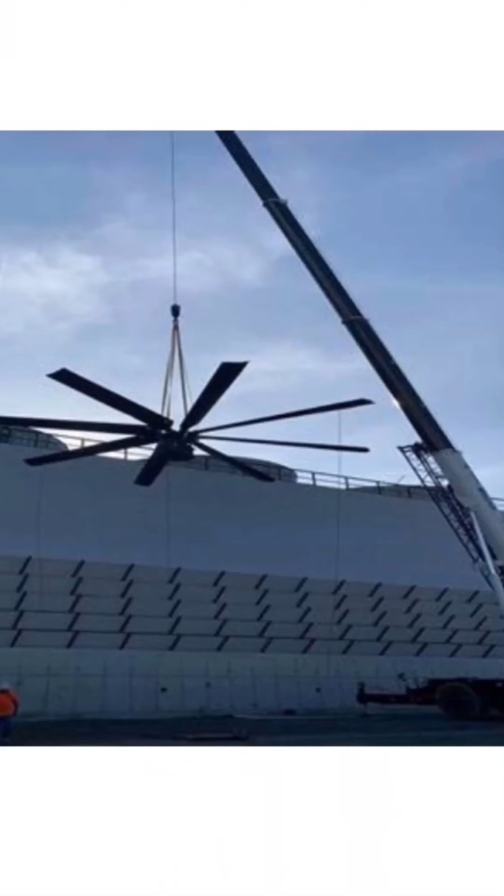The crane rigger has many responsibilities and plays an integral part in the safety of a job site where cranes are in operation. A crane rigger's responsibilities are to know how to fasten loads in order to meet company and federal rules, regulations, policies, and procedures. You must also know how to use appropriate cables, pulleys, winches, blocks and sheaves, wires, straps, and chains.

Crane riggers must also inspect equipment prior to use. They may need to oversee or direct crane operators. Crane riggers may need to complete paperwork at the end of a lift, documenting work completed and any problems encountered. They are also responsible for dismantling, cleaning, and storing equipment after use.

Education and experience are key to being a safe and efficient rigger. You'll need to complete training to learn how to work as a crane rigger. Cooling Towers LLC also requires our crane riggers to have specialized training and be familiar with the Occupational Safety and Health Administration, or OSHA, guidelines.

Skills inherent in rigging are knowing how to properly and safely use rigging equipment and how cranes operate. Riggers must have impeccable communication skills, be able to work well with others, and have strong mechanical aptitude. Having basic math skills and good judgment can help you succeed, as can knowing how to identify and solve problems.

This crane rigging training has been developed for those working around the rigging of loads for crane operation and covers the knowledge needed by a worker to safely and properly perform the many tasks required of a rigger. This training only covers the basics of rigging and does not certify you as a rigger.

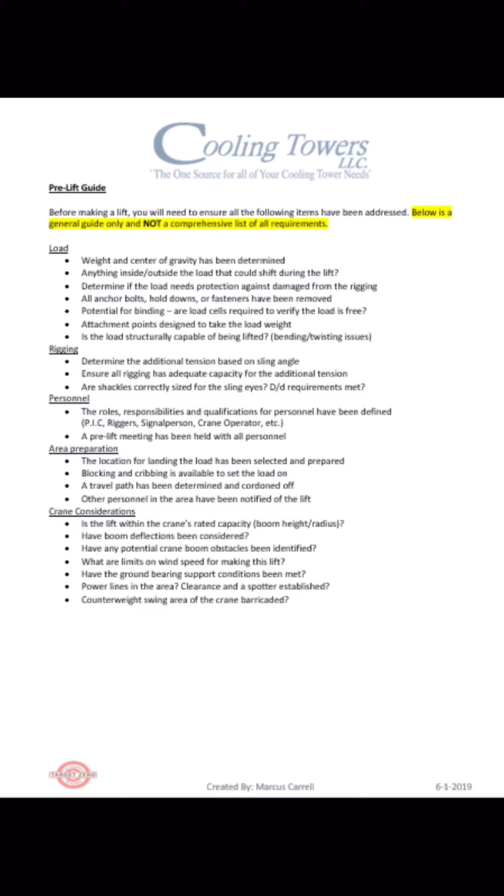Each day before being used, the slings, all fasteners and attachments shall be inspected for damage or defects by a competent person. Additionally, inspections shall be performed during sling use where service conditions warrant. Damaged or defective slings shall be immediately removed from service. Whenever any sling is used, the following practices shall be observed. Slings that are damaged or defective shall not be used.

Slings shall not be shortened by knots or bolts or other makeshift devices. Sling legs shall not be kinked. Slings shall not be loaded in excess of their rated capacity. Slings used in a basket hitch shall have the loads balanced to prevent slippage. Slings shall be securely attached to their loads. Slings shall be padded or protected from the sharp edges of their loads.

Suspended loads shall be kept clear of all obstacles. All employees shall be kept clear of loads about to be lifted and of suspended loads. Hands or fingers shall not be placed between the sling and its load while the sling is being tightened around the load. Shock loading is prohibited. A sling shall not be pulled from under a load when the load is resting on the sling.

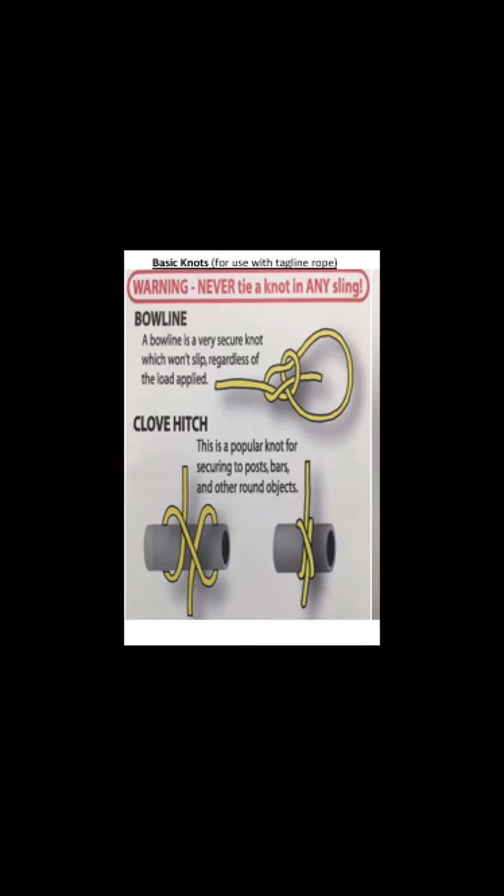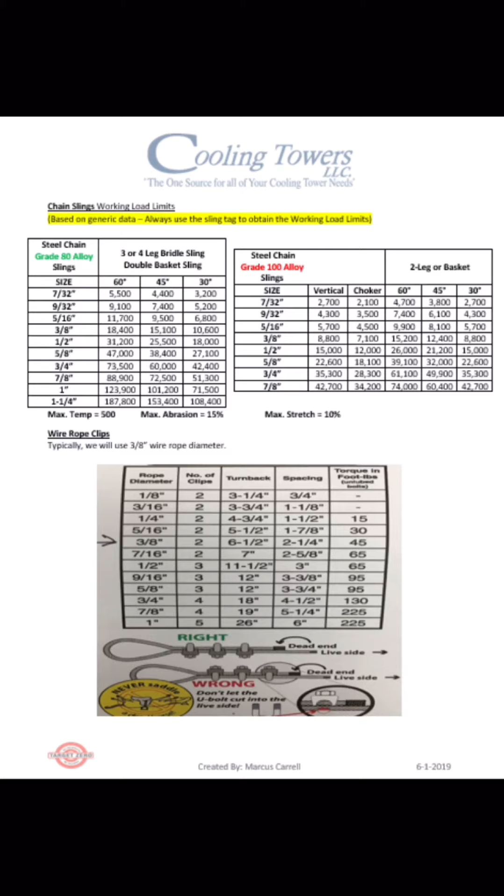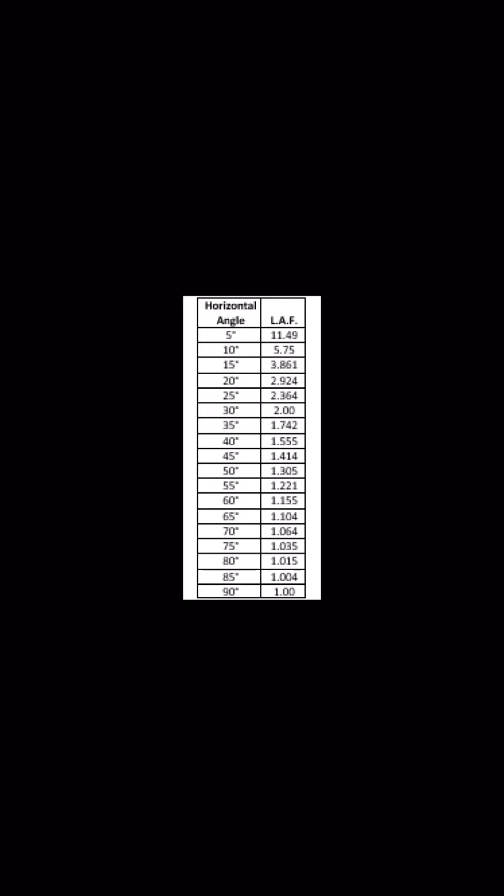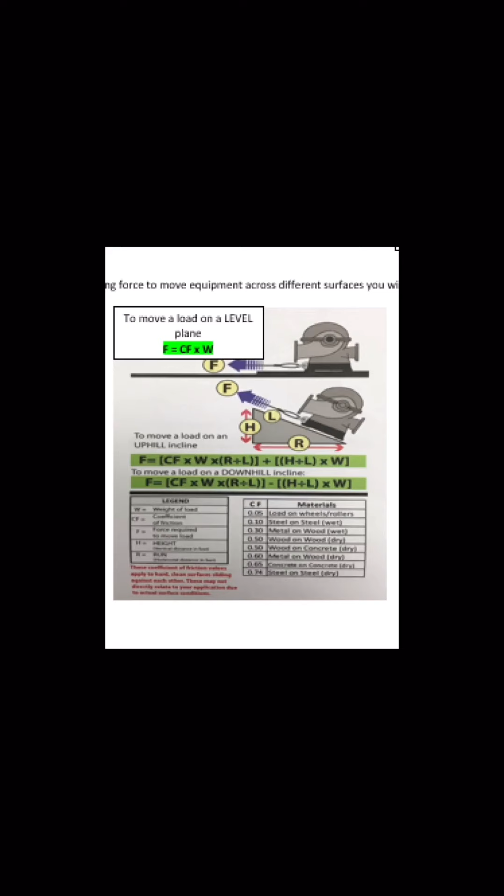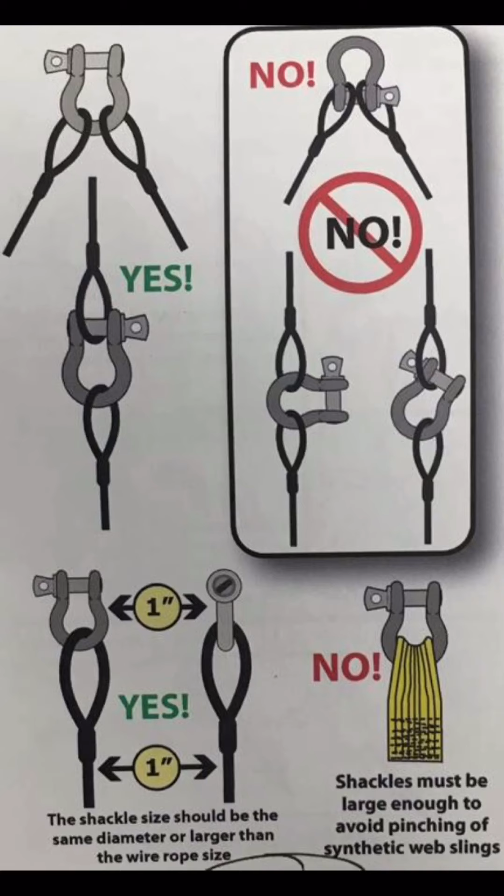When using shackles, you will never set the bridle on the pin side of the shackle. Avoid side-loading shackles. The shackle size should be the same diameter or larger than the wire rope size used. Additionally, shackles must be large enough to avoid pinching the synthetic web slings.

There are 3 types of eye bolts: universal or swivel eye bolts, shouldered eye bolts, and non-shouldered eye bolts. As with all lifting hardware, eye bolts should be inspected before use. Eye bolts should always be loaded in the plane of the eye. Only shouldered eye bolts can be side-loaded.

Spacers or washers shall not be used between the bushing flange and the mounting surface of a universal or swivel eye bolt. Eye bolts and hoist rings should be threaded into the surface a minimum of 1.5 times the thread diameter. Flat washers may be used under the shoulders of shouldered eye bolts to position the plane of the eye.

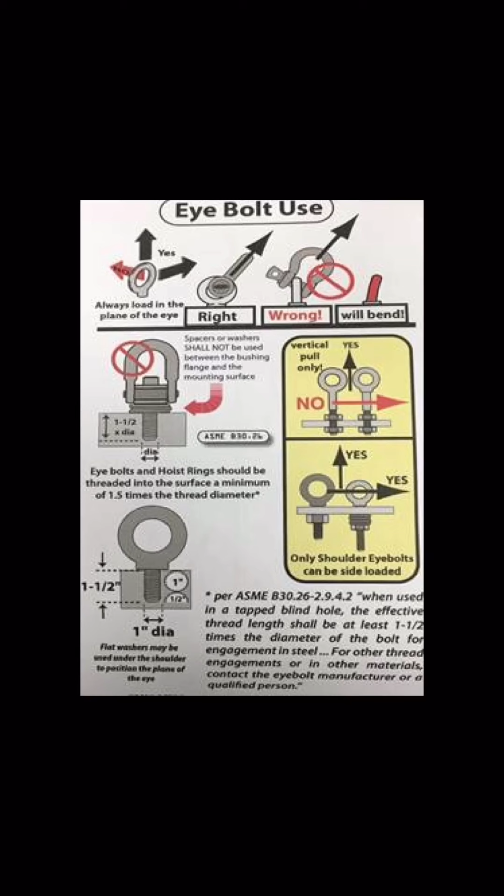When using a hook, a 90-degree maximum angle for the hook should not be exceeded. Instead, you will use a shackle when lower horizontal angles are encountered. A hook latch, if required, must be operational, otherwise it shall be removed from service. Never tip load a hook. The width of the hook should not be wider than 1/2 the length of the eye. Duplex hooks should be loaded equally on both sides.

When inspecting a hook, you will check for distortion or twist, as well as check the throat opening to ensure that it is within 5% of the manufactured throat opening. A hook is not allowed any distortion or twist.

There are 3 types of inspections. An initial inspection is before any new sling is placed into service. It shall be inspected by a designated person. A frequent inspection is an inspection that shall be performed by the user or designated person each day or shift the sling is used. A periodic inspection is a complete inspection for damage to the sling that shall be performed periodically by a designated person. Record keeping and documentation may be required for inspections.

Slings shall be immediately removed from service if any of the following conditions are present. Synthetic web slings: acid or caustic burns, melting or charring of any part of the sling surface, snags, punctures, tears, or cuts, broken or worn stitches or distortion of fittings, missing or illegible identification tag.

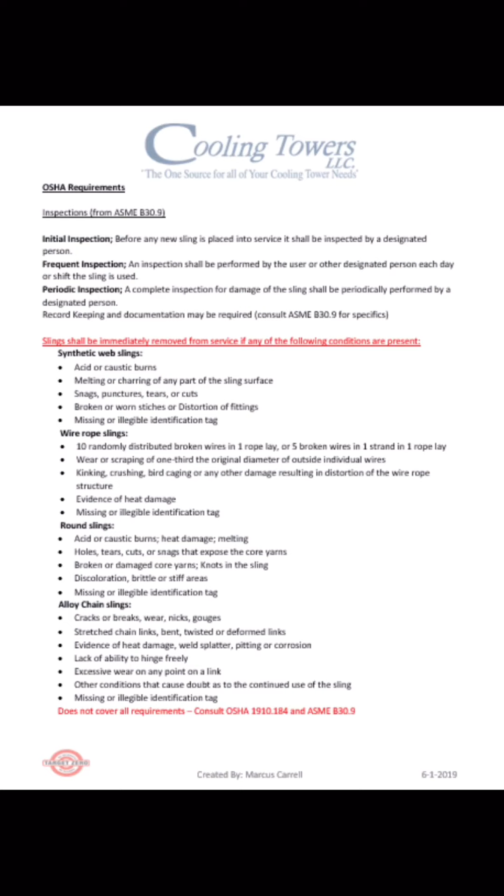This slide covers personnel lifting equipment. If you want to use cranes to lift people, it is critical that you adhere to a strict set of requirements. Cranes are not designed to be personnel lifts. In fact, most crane manufacturers specifically state that their machines are for material handling. But it has been recognized that cranes can be used to lift people.

The only real issue is how the people involved in the lifting operation deal with the safety issues to ensure that the crane and operation will not injure or kill anyone. The following are minimum requirements for personnel lifting equipment. Must be designed by an engineer or competent person. The welder must be certified by the American Welding Society. The latest inspection report must be kept in the waterproof compartment.

Must have a minimum capacity of 300 pounds. Have a maximum wire mesh size of 1/2 inch. Have an initial or repaired basket test weight of 150% of the intended load, with a normal operation basket test weight of 125% of the intended load. Minimum test time for trial run is 5 minutes. There are 3 required crane attachments: boom length, boom angle, and an anti-two-block device.

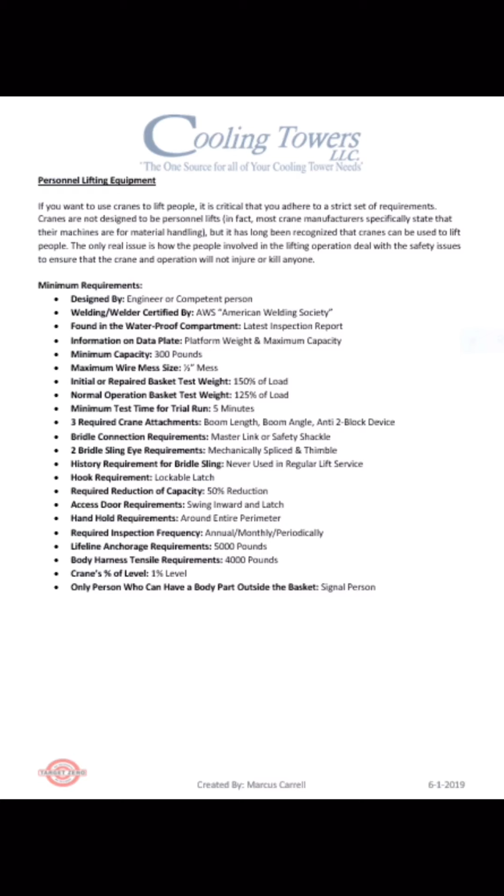Lifeline anchorage requirement is 5,000 pounds with a body harness tensile requirement of 4,000 pounds. The crane is required to be within 1% of level. The only person who can have a body part outside of the basket is the signal person.

When cranes are set up close to excavations or trenches, there may be an increased risk of the sides of the excavation or trench wall collapsing, causing the crane to overturn. This risk increases with softer ground and the presence of groundwater. The risk of collapse is greater for vertical cuts in the excavation wall compared to walls that have been sloped back at an angle. The following have a direct effect on the ability of the ground to support loads: trenches, embankments, excavations, ditches. General rule: outriggers should be positioned a minimum of 2 times the height of any trench, excavation, or ditches.

The operator must also be made aware of any underground utilities that can affect support on the job site, such as basins, vaults, cellars, buried tanks. General rule: outriggers should be positioned a minimum of 1.5 times the height of any cellar, vault, or basins.

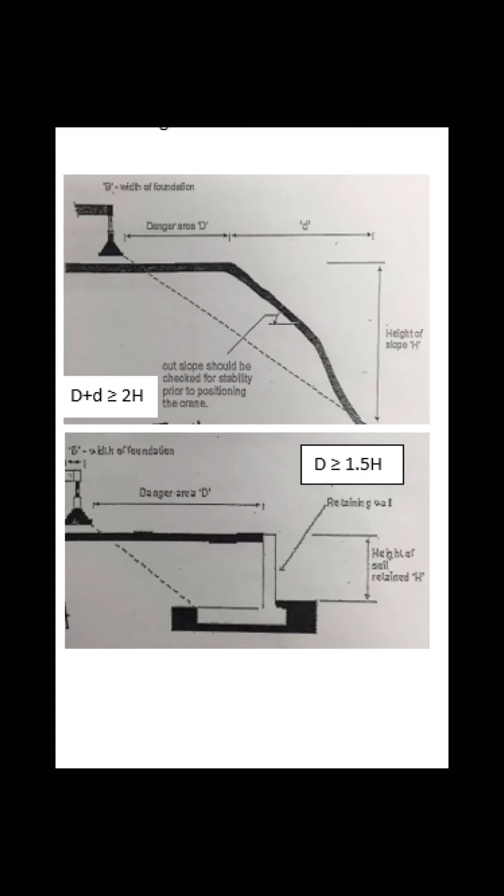Before assembly or disassembly of a crane, the employer must determine if it could come within 20 feet of a power line. If so, the employer must either confirm with the power company that the line is de-energized and visibly grounded at the work site, or make sure no part gets within 20 feet of the power line, or follow the requirements of this table, which has minimum distances based on voltage.

If the line is de-energized, which is usually the case, the employer is required to conduct a meeting with the assembly and disassembly crew to review measures to prevent encroachment. They must use only non-conductive tag lines, and they must use a dedicated spotter, an elevated warning line or barrier in view of the operator, or an alarm or automatic control system. Cranes cannot be assembled or disassembled below an energized power line or within the minimum distance referenced in the table of a power line. And if the table is used, the owner or utility must provide the voltage to the employer within 2 days of a request.

Power lines must be assumed to be energized until they are confirmed to be de-energized and visibly grounded. Warnings about electrocution hazards must be posted in the view of the operator in the cab and outside the cab. The work zone around the equipment must be marked 360 degrees around the equipment to prevent encroachment within 20 feet of a power line.

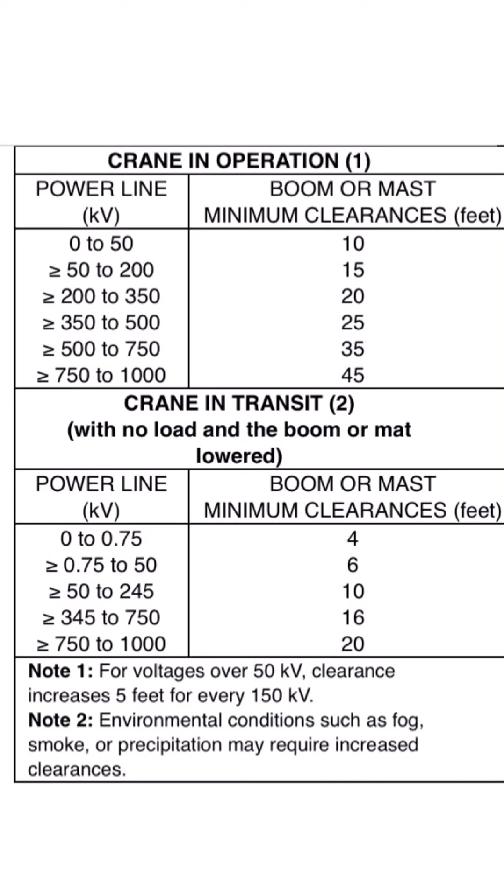Hand signals provide a simple solution for the communication issues faced by crane operators. Although radios can be used to relay messages across the site, there are some situations when an operator will need extra assistance. Construction sites are loud. They produce a high level of noise from activities such as digging, piling, and drilling. Therefore, it can be difficult to convey instructions in an accurate and time-efficient way. There are also times when an operator's directional visibility is obstructed or the visibility of a load area is partially blocked. Conducting a lift with these types of conditions can put the operator and the workers around them at serious risk of injury.

Although it is recommended to use hand signals during all lifts, it is these times when a signal person will be called upon. Easy to understand, hand signals help the operator avoid any potential hazards, completing actions in a safe and timely manner. The following are hand signal descriptions. Move slowly is signaled by using one hand to give any motion signal and place the other hand motionless in front of the hand giving the motion signal.

The hoist signal is given with forearm vertical, forefinger pointed up, moving hand in small horizontal circles. The lower signal is given with arm extended downward, forefinger pointing down, moving hand in a small horizontal circle.

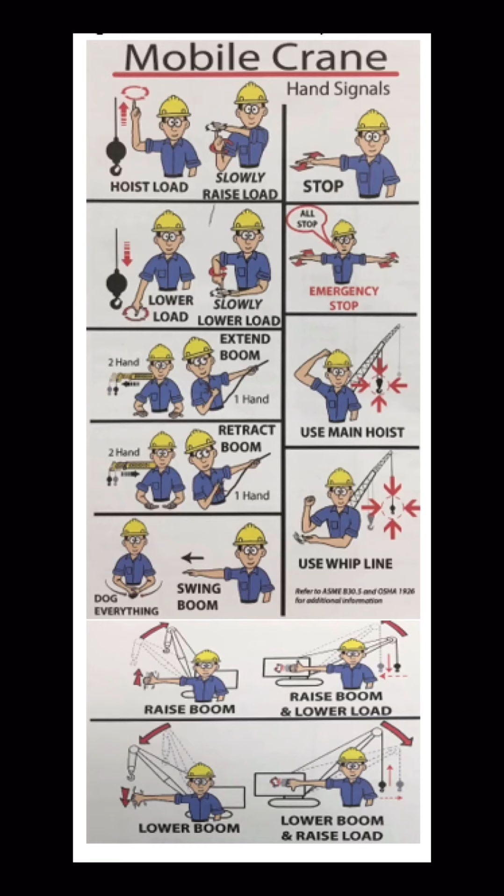The signal person is also responsible for preventing injury and accidents to the best of their ability. This is done by following strict procedures during crane operations, for instance, standing in clear view of the crane operator, ensuring the operating area is clear of people and hazardous objects, and performing one signal at a time to avoid confusion. The signal person must have a basic understanding of crane operations, limitations, crane dynamics, and boom deflection, and have demonstrated through a written and practical test understanding of the methods for crane hand signals. Additionally, they will need documentation from a qualified evaluator or a third party that they meet the requirements.

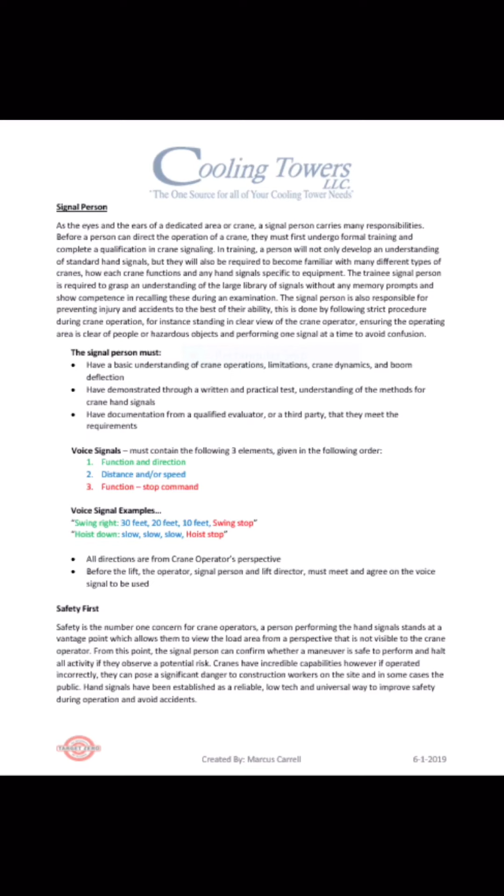Safety is the number one concern for a crane operator. A person performing the hand signals stands at a vantage point which allows them to view the load area from a perspective that is not visible to the crane operator. From this point, the signal person can confirm whether a maneuver is safe to perform and halt all activities if they observe a potential risk. Cranes have incredible capabilities. However, if operated incorrectly, they can pose significant danger to construction workers on the site and, in some cases, the public. Hand signals have been established as a reliable, low-tech, and universal way to improve safety during operations and avoid accidents.